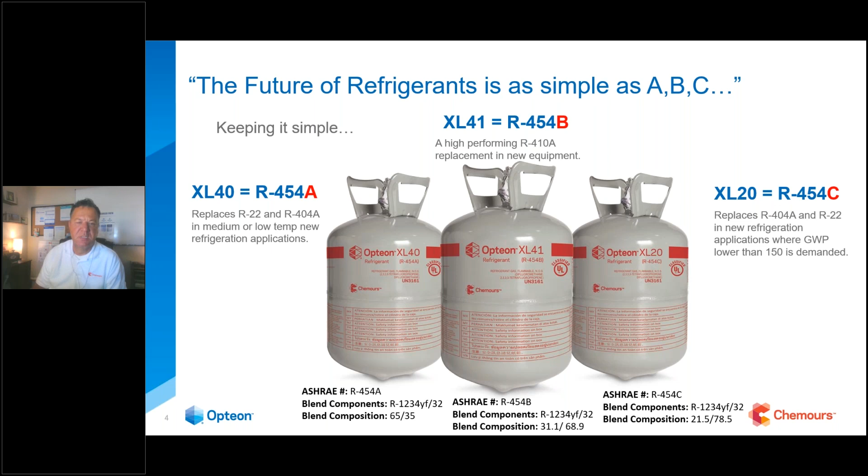So real quick, what's an HFO? For those of you that missed it last week, I want to go over this. So we know what CFCs are, we know what HCFCs are, we know what HFCs are, which we're moving from right now because of the global warming potential. And now we're moving into the new kid on the block, if you will, the HFO, or hydrofluoroolefin. By definition, an olefin is simply telling you that you have two carbon atoms next to each other. And this is kind of the secret sauce with an HFO.

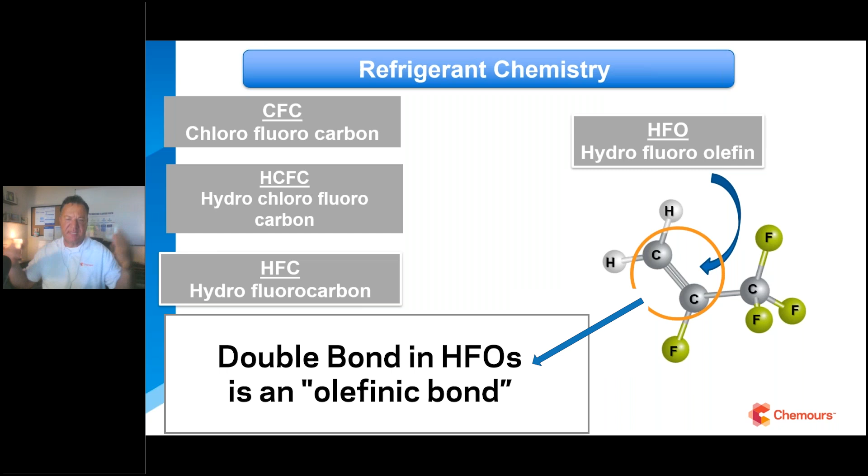It's very unstable, so it's a little harder to manufacture, but that's the beauty of it when it gets exposed up in the atmosphere. It breaks up a lot quicker compared to an HFC, all right? So for example, I'm going to compare 134A on the left-hand side, which we've used in medium temp or the automobile industry for years, and the HFO molecule R1234YF. And you can see the difference down here in the years. It's 13 years for 134A that it stays in the atmosphere, compared to 10 days. So that's really why we're having this conversation.

And the last note here, you may not know what the number, the GWP, means. Just know this: the higher that number is, the faster it's on the chopping block in the EPA's eyes. And that's who's driving all this. It's not a manufacturer. It's not the government. It's the EPA. They put them in charge, and that's the way it is.

So we got a comparison of 1300 compared to less than 1. So that's a big deal. And that's why you'll see R1234YF moving forward in a lot of blends down the way. Now, this is what it looks like on a PT chart, and you can see how closely it resembles almost exactly. It's a little less charge than the 134A is. Very, very efficient, does the same amount of work.

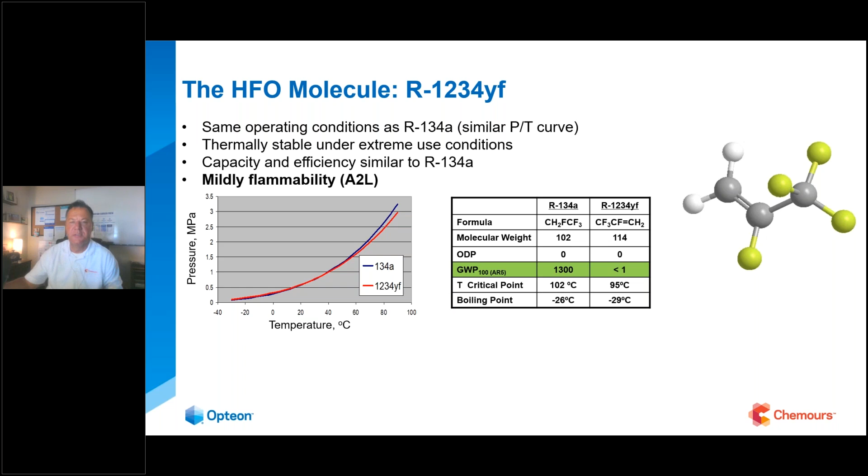I mean, that's the first and foremost thing we've got to do with refrigerants. That's one of the biggest criteria. Does it do the work? Then we look at GWP, we look at flammability, we look at toxicity and those kind of things. But first and foremost, it has to do the work, okay? Or it's not a good refrigerant, obviously.

So I used to say they're coming at my prior job. They're here. Where are they at? Well, if you bought a car in the last 7 years, every car made today in the United States has 1234YF in it, okay? Up until then, it was 9 out of 10. So it's 100% of those cars. 9 out of 10 in the world have 1234YF in it, okay?

If you bought a window unit in the last 7 years, a PTAC unit, a dehumidifier, and a portable system, a mobile system, you've already worked around A2Ls, or you've been around them. Every hotel we all stay in has a PTAC unit. I can almost guarantee you that that has R32 in there. A lot of that stuff isn't made in the States anymore. It's Asian driven. R32 derives from Asia, and Daikin specifically. And so you see a lot of that already.

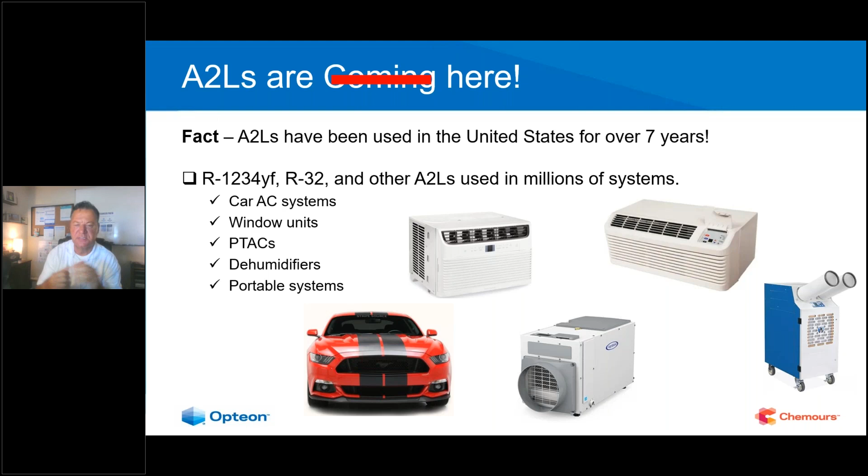So it's not really new to us. The takeaway here is that it's already beneath the hood of your car. There's nothing to fear here. And this is just some of the examples of some of the cars today that we're talking about. Now, what's not changing? First and foremost, currently no A2L testing is required. So take myself, for example, my EPA card will be grandfathered in. There won't be any change in that at all right now.

Now, the EPA did take suggestions, and they have not announced those yet. But I have a strange suspicion more than likely nothing's going to change, but I could be wrong. So stay tuned on that. I can't speak for the EPA. Moving forward, future EPA cards will have A2L questions on them, like we saw when we took our 410A test. It wasn't really a certification on a federal or state recognized level. It was someone coming into the shop.

I'm just explaining what happened to us, and they said, we're going to give you a test on 410A. It's going to change the world. This is this new refrigerant. And you took it, you got a certificate, but it really wasn't recognized federally or by the state. So the same concept here with the A2L refrigerants.

Training is important, however, okay? Any training you can get, and there's plenty of it out there, whether it be through Chemours or anyone else. And I'll share just a handful of those other areas that I like to use and some of my friends use. Just kind of recommend some places. And you probably have your own training set up at your distributor too.

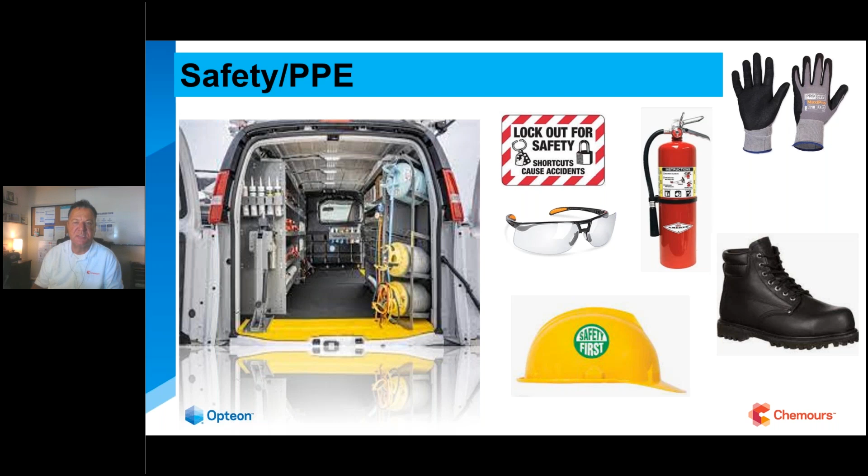Let's take a look at our trucks for A2L refrigerants. Before we do that, we're going to pop up a poll question. Corey, do you have that question?

Don, the poll question is up, and I can ask it. So the quick poll question is true or false: you will need new placards for A2Ls on your service trucks. So what we would ask is if you guys, and people are already ahead of me. They're already starting.

That's good. What we'll do is we'll just give this maybe just about 30 seconds. Really appreciate everybody filling it out. Right now, we have over 55% of the attendees have voted. So we're getting close to 60%. So if you could, I would encourage you to just click what you think. Part of the polling process is we all learn off each other. So we'll just give it a couple more seconds. We're at 63% voted.

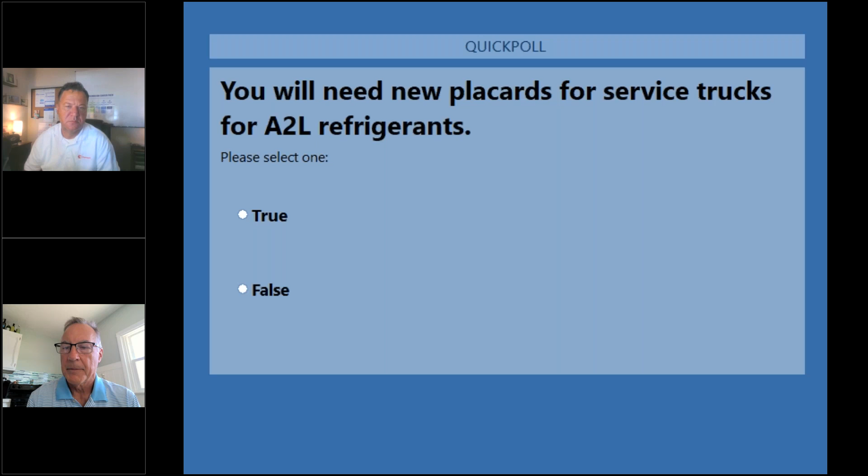Okay, so we'll close it out. What we ended up getting, Don, was 73% voted false and 27% voted true. We had almost a 70% response rate. Wow, thank you. That's incredible. Thanks, everyone.

So the folks that wrote in false, you are correct. No special placards will be required when you go to A2L refrigerants. Box trucks and semis will be different, obviously. So just a high level view of the service vehicles. Under the materials of trade, it's business as usual. What do you mean by that, Don? It's the same restrictions in place as before, and that was 440 pounds maximum regardless of the hazard. So acetylene, anything, it didn't matter what was in your truck. Now, obviously that's not one tank, but accumulated. So 440 pounds. So to me, that's good news.

I mean, they didn't lower the pounds, even though it went to a different ASHRAE standard 34 A2L rating. So that's good news. Federally, there are no placards required for service vehicles. So again, it's business as usual. You won't need anything. And that's why we're doing this, to get some of those myths out there and get some of that information, because it's new to all of us, right?

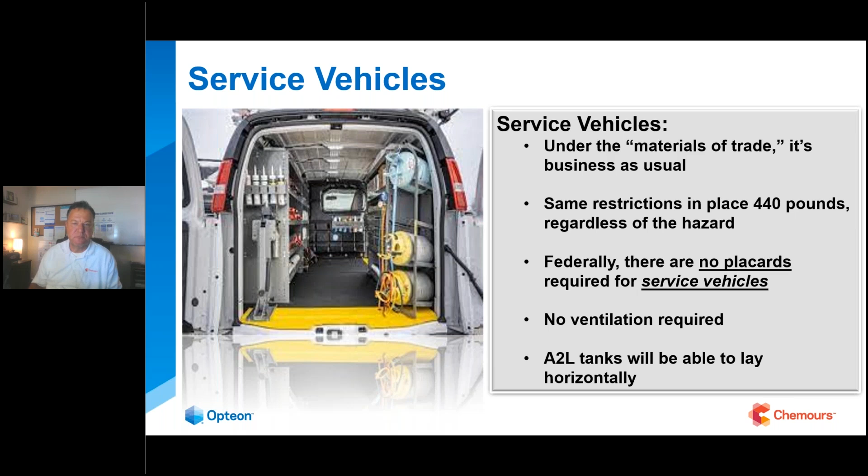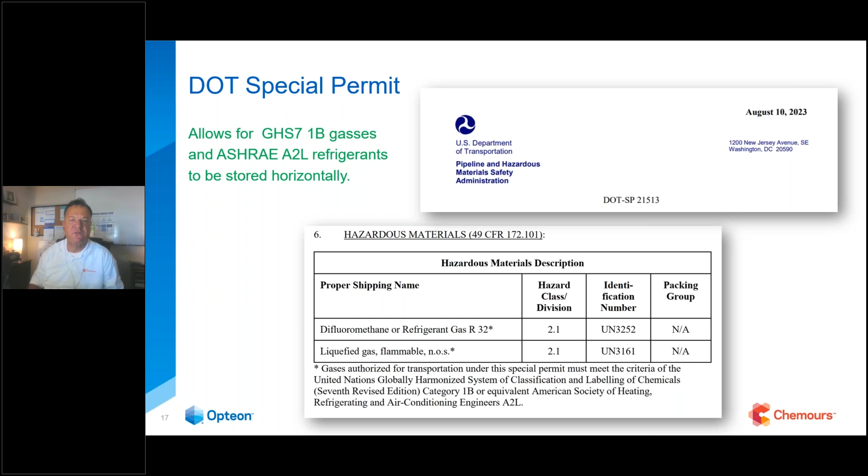Here is the actual permit that will be stamped on the tank for being able to lay horizontally. There was some pushback originally on that, and they've got that approved. We did everything that the Department of Transportation wanted us to do, so they gave us a special permit. And Chemours did this for the industry, by the way. By us getting passed, it allowed everybody to use this number stamped on their tanks also. So they didn't have to go through all the hurdles that Chemours started on about 3 years ago, from what I understand, okay? Okay, tools.

We have another poll question. Mark? Okay, so poll question number 2. You will need to buy all new tools when using A2L refrigerants. Once again, it's a true false. True or false? So once again, we'll give about a minute for folks to respond and select which one of the two options they believe to be correct.

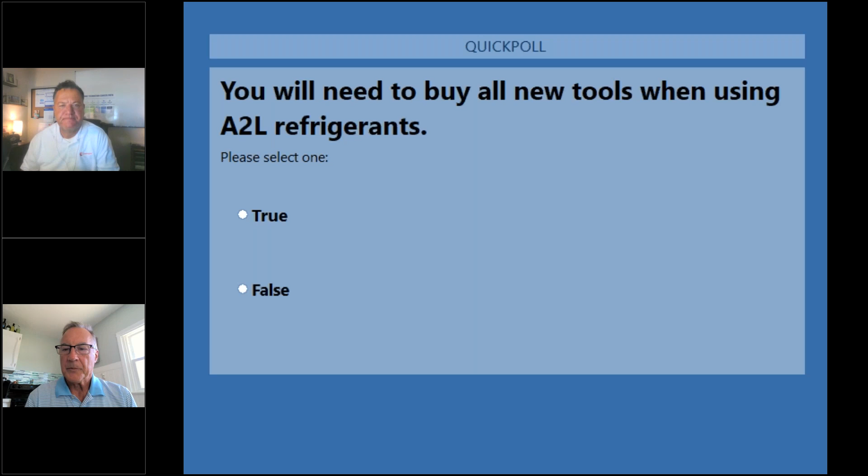We're getting much better. We have 66% of the folks already responded. So I will just give it a couple more seconds, but greatly appreciate everybody responding. Okay, we're at 70%. Once again, thank you. It's awesome. Wow. So in terms of the poll response, very uniform understanding. This is sort of awesome.

About 87%, Don, responded false.

Only 13% responded true. That's great. Yeah, so the answer is false. However, let's talk about that a little bit, okay? So there were a lot of rumors going around, and I've heard horror stories of people retooling all their vans and things. So most of the hand tools, if not all of them, will be okay.

Also, anything electrical, from what I'm understanding, and no one's come back and reached out to me and said, hey, that's not necessarily true. So the bottom line is make sure you check with the manufacturer. I've been looking into this for quite some time now because I've been teaching A2Ls for quite some time.

And if you go to the manufacturer of your recovery unit, whatever that looks like, your drills, they have actually done a good job of having a little A2L tab on their tools, and they're showing the model numbers that are approved. And now moving forward, you'll probably see things moving from AC to DC motors and those kind of things. There's a recommended 10-foot radius.

It's not required. It's in the UL document. It mentions it, but it's not required. But it's no different than a utility company out on the corner working on power lines with their orange cones. So as of right now, it's just a recommendation. So check with the manufacturer or check with your distributor, you guys and girls out there, and confirm that everything you sold them is in fact okay.

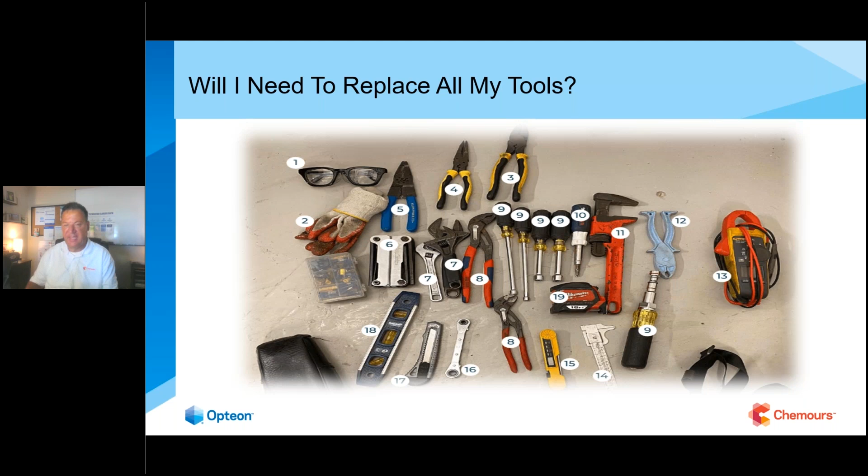And what you will see is all of them having A2L compliant on them now. So don't buy anything moving forward that doesn't say A2L compliant, okay? So that's that. And like I said, they've been around for almost 2 years now. And I don't want to name drop any brands. We're not branded here. And I started out with just a few of these when I first started.

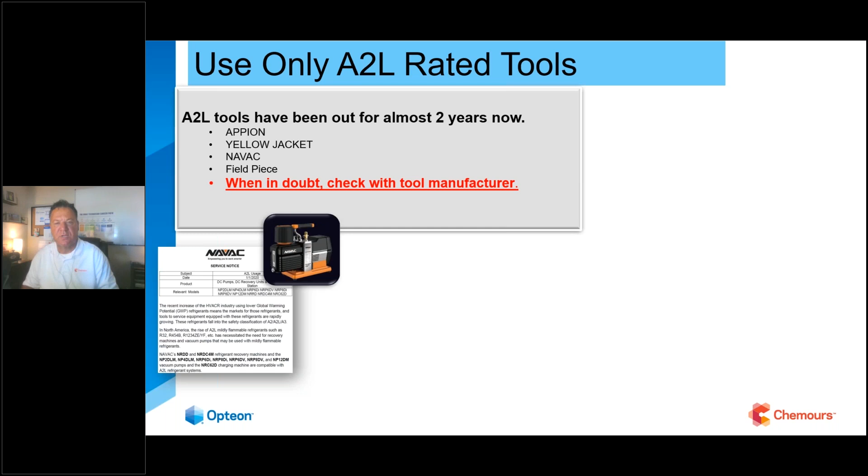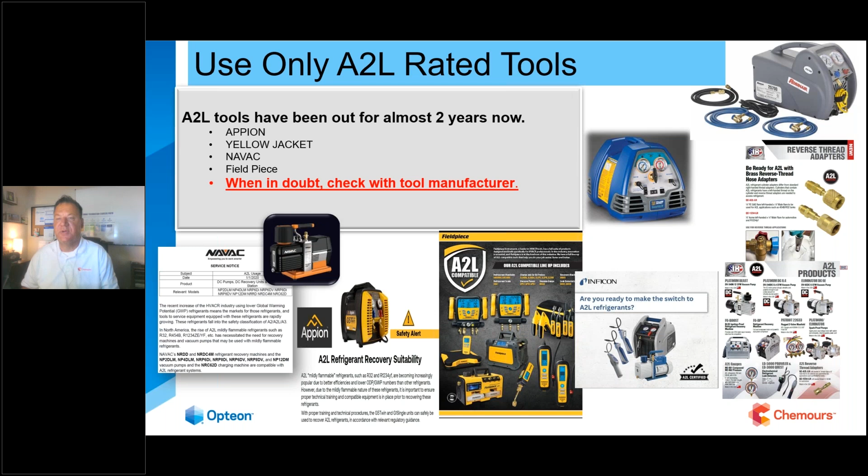And as time went on, everywhere I would speak or do some training at, inevitably a tool manufacturer sitting in the audience would come up and say, hey, we have that stuff too. And so to be fair and balanced here, I started putting everybody's on there. It started to look like a NASCAR. So the takeaway from this is everyone has A2L rated tools out there. So they're not hard to find, and you're probably all giggling because you sell them.

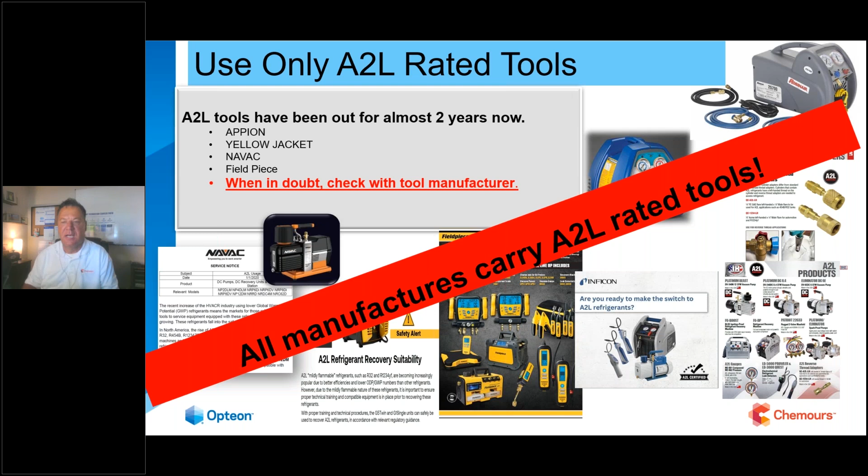So they're out there. At the few expos I've been to recently, you can see the A2L sign at their booths from a mile away. Everybody's boasting about it. In fact, I heard one guy say, our tools have always been A2L compliant. I thought that was a cute little marketing scheme there. They've never meant to leak, and they seal up and what have you. So no need to go out and replace all your tools.

So when it comes to all these tools again, we're talking mainly about your detectors. Let's talk about detectors for a second. Detectors, as I said earlier, with the 454B product and R32, quite honestly, you already have those refrigerants in your detector. The 454B is 1234YF, which is already on a detector, and the R32. So the detector should be the same as it was before.

Now, on compound gauges, if you're old school, or analog gauges, if they don't have the refrigerant, obviously you have to get new gauges. If you're a digital person like I am, or Bluetooth, which I really love, on the digital you'll just plug them into the computer and get your updates. And that's how that's been done for years now. On the Bluetooth, the app will automatically update itself, so you're good to go there, okay?

Again, recovery machines, you'll start to see them say A2L compliant, but quite honestly, it doesn't mean they've changed everything in there. But always check, like I said, if you have something you've had for 20 some years, check with the manufacturer. They'll have the final say. But I haven't heard any horror stories of anyone saying, hey, this model does not work around A2Ls, okay? So a lot of things have been tested, electric hand tools, cordless drills, all kinds of things.

Now, unless you're really, really good about purging your lines on every change out, especially if you're in the supermarket industry, because you deal with so many different refrigerants, I would recommend going to different hoses on the A2L refrigerants.

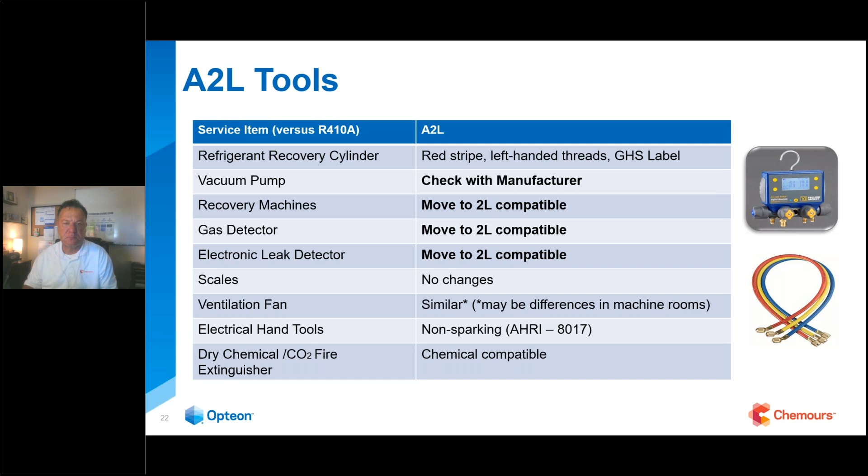Now, I think I butchered this, Mark. I think I actually already showed the answer on this, and I can throw another question out there if we want to do this. In fact, I think I will do that. If you see the question, I think I've already answered that, I got ahead of myself a little bit. No, is it about the tank horizontally? Yes, but you didn't answer it. Okay, all right, yep.

Go ahead. So the question is, A2L refrigerant tanks will need to be upright in your service vehicle. Once again, it's a true false selection. Basically, in terms of cylinder orientation in your service vehicle, is it required to be upright or not? Okay, so we'll give folks a minute or so. Once again, we're racing to that over 60%, so this might go a little quicker.

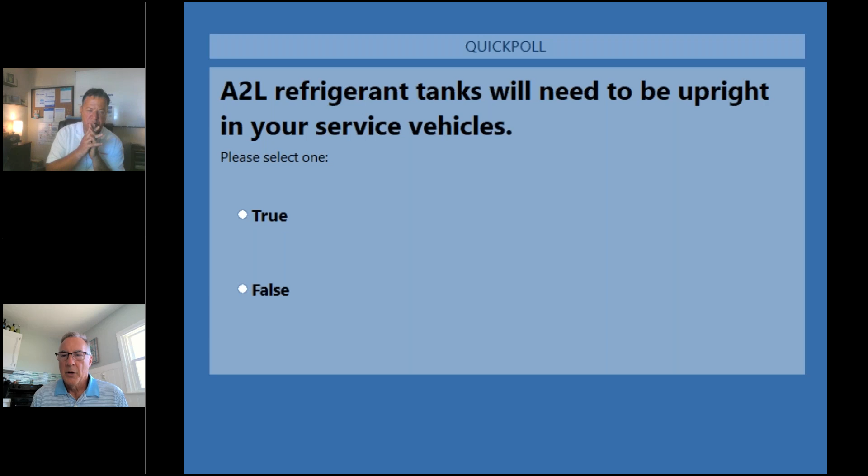Okay, we're actually over 70% on this one. Nice. Once again, Don, I believe the information is getting out there, because 94% responded false. Only 6% responded true. Yeah, and I wondered what that would have looked like a year ago, because even on webinars, they were still saying that. It's been a big change, and that was very welcome news, as you know, Mark. So yeah, you are correct. We're going to allow those tanks to lay on their side.

Again, the thought process on the EPA, you don't know what you don't know, right? They don't know what we know. We don't know what they know. So the thought process on having that tank vertical was to have a vapor buffer or barrier, if you will, up against that rupture disc on the tank. Their fear was that if you laid it horizontally, like we do now, and you were driving your van on rough terrain, or took a turn, that liquid could splash up against that rupture disc if the tank was a little warmer, and send it off unexpectedly. So like a premature rupture.

So they really wanted that tested, and like I said, Chemours, kudos to them. They did that before I came here. Actually, it got approved after I came here, but they've been working on that for quite some time. So you will be able to lay the tanks horizontally like we do. And keep in mind, the proper way has always been that you want that safety device, whether it's a rupture disc or this new relief valve that I'm going to show you in a little bit, at the 12 o'clock position, not the 6 o'clock position, just to be safe. Not a lot of people do that, but that's the proper way to do it.

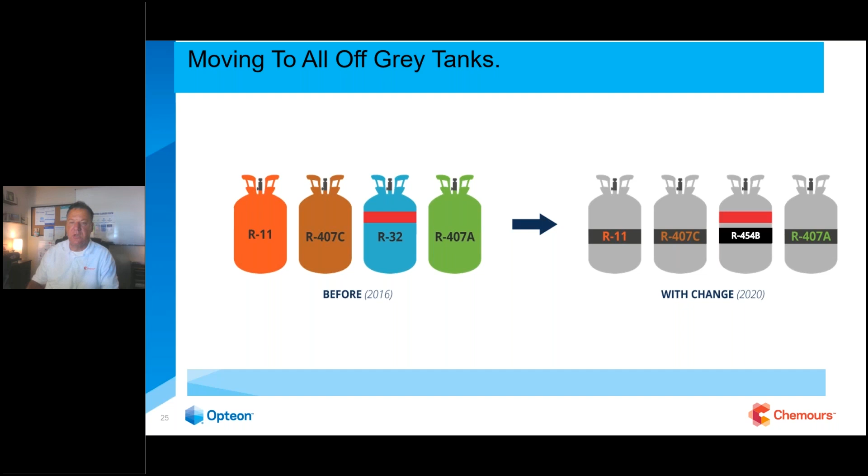The fear here, from my understanding, was take that 407A tank, for example. The fear was that if they get a tank of A2L refrigerant that was just a little bit off green from that, someone, new or old, would grab the wrong one. And I know that's been a situation before with 410A and other refrigerants. So that was the purpose behind it. Okay. Also, the purpose for the left-handed threads. So you'll have a red band around it.

Also, by the way, the recovery tanks will also have a red band on them. They will also have left-handed threads, by the way, if you haven't heard yet. Those are being produced right now as we speak, since about a month and a half ago or so. All DACs will have left-handed adapters. You will need an adapter to go on that to change it back to right-hand threads.

I know that sounds a little silly. I didn't really like the idea at the beginning, to be honest with you. But being a technician for years in the field, spending so many years in a truck, and our oldest son being a technician or licensed contractor today, you see nationwide, and I'm sure in your area, new technicians starting in the industry every day. And there's thousands of them nationwide. And some of them, like it or not, are being put in positions that they're not ready for. Same thing happened to me. I went from preventive maintenance to running service calls simply because we were 50 calls behind.

So I like this idea now even more so, and here's why. If Julie or Jim are out on that call and they're new to service and they go to try to put their hoses on that tank and it doesn't go on, I'd rather see them call you at the distributor or the service manager or someone they trust and say, hey, don't get me fired, but this isn't going on. Stop what you're doing. Does it have a red stripe around it? Yes, it does. Okay, that's A2L. So it's a learning curve. It's more of a pause button, if you will. And I really, really like that.

Okay. So those are two flags. If you knowingly put A2L refrigerants in an existing system, you are knowingly breaking the law. Okay, so the red stripe, the left-hand threads, that will be your go-to. And a lot of the tool manufacturers are making their own little adapters with a little more flexibility, a little more length on them, and they're all really promoting that out there right now.

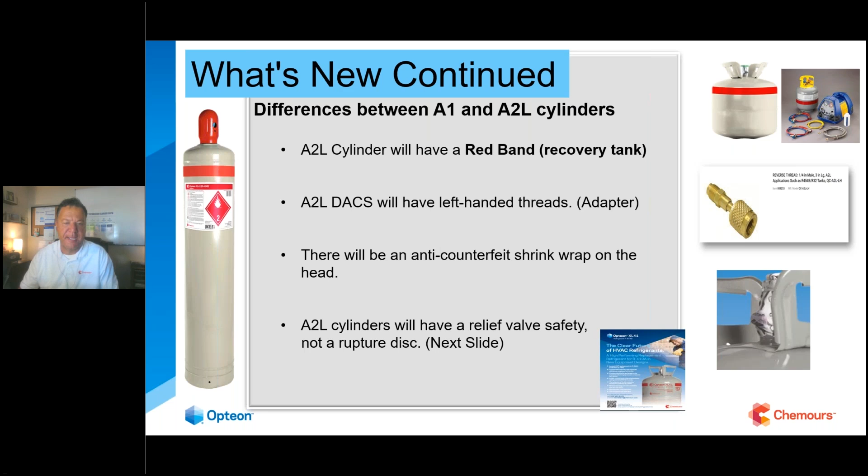So the way it works is if it were to get above those temperatures or above the specs on that tank, the rupture disc is designed to pop and blow the whole charge. So you're keeping something catastrophic from happening, like turning it into a giant hand grenade. That's how A1 tanks work, and that's how they still will be moving forward.

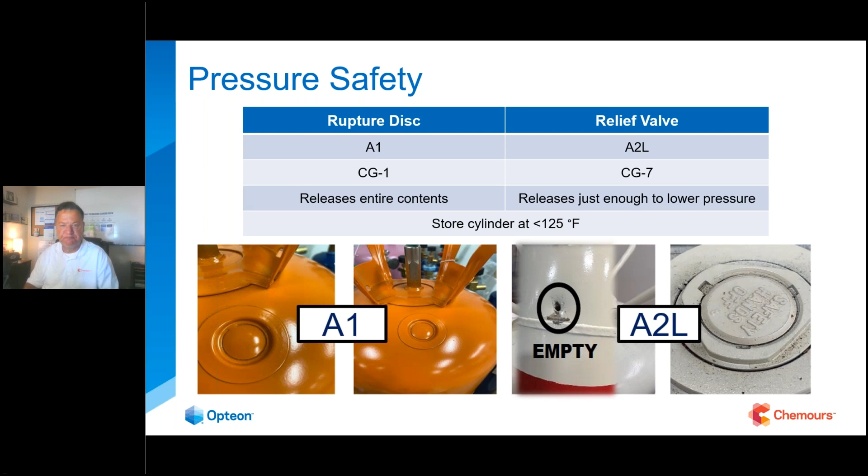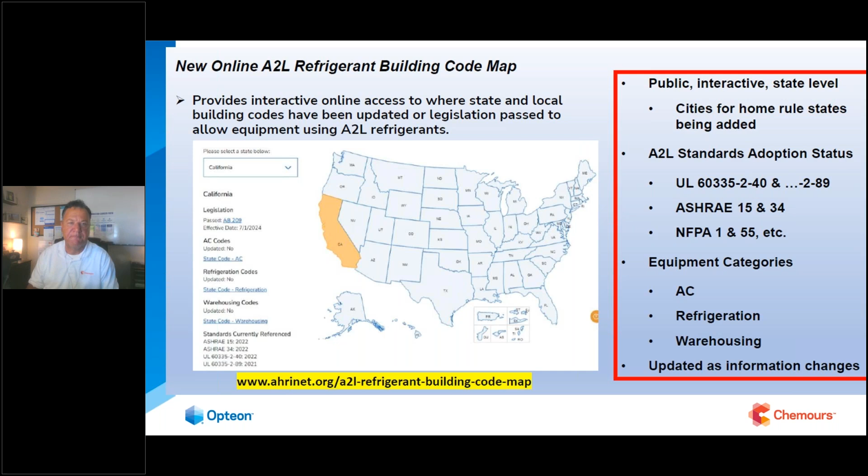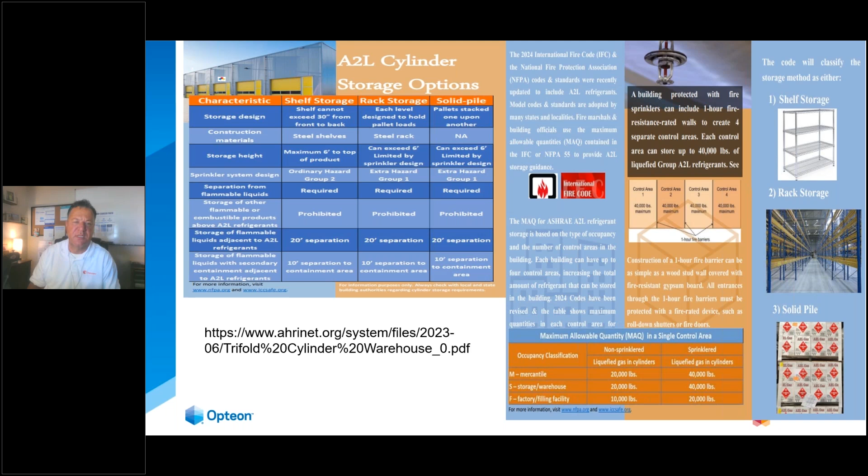Here's just a trifold. You can go to AHRI storage, A2L refrigerants or something like that for search. It comes up very easy if you just put AHRI A2L storage. It's a little color trifold, kind of gives you an outline of it. They are now trying to get it implemented in the states and at the local jurisdictions. This was the recommendation. It has not been enforced yet, but it soon will be. They're going to try to implement it into the codes for storage and what have you.